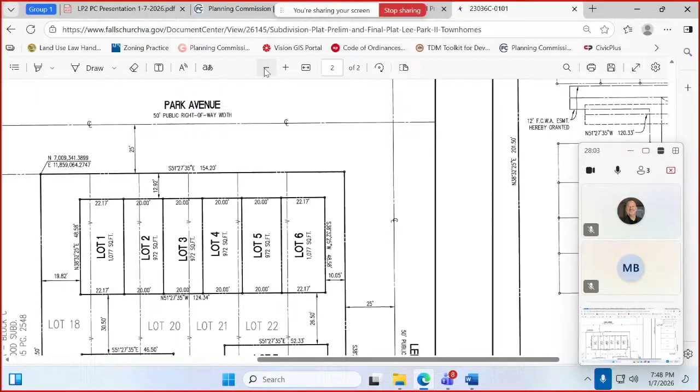Two public meeting signs were posted along the frontage of North Lee Street and Park Avenue on December 31st, 2025. This application was received on December 10, 2025. This subdivision has a 60-day review limit. Staff recommend that Planning Commission provide input and guidance on the subdivision application and schedule it for final consideration on February 4th, 2026. This concludes staff presentation.

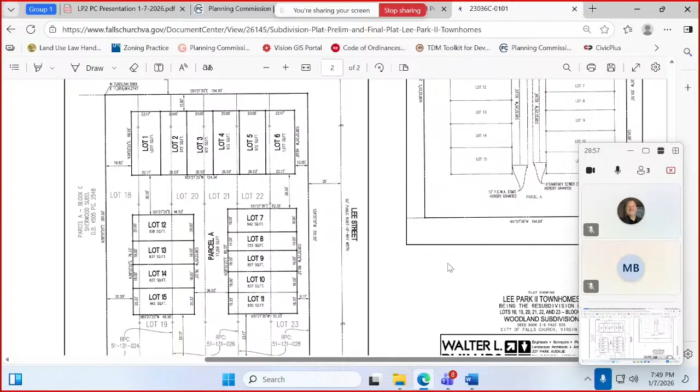Thank you, Mr. Zhang. Does the applicant have a statement tonight? They were going to talk about the site plan, not the subdivision. Do you want to talk about the subdivision? I have a presentation to give, but it relates more to the site plan. Correct. Okay, thank you.

All right, I think I can open it up to questions or comments from the commission. Save it for the site plan. Okay, the site plan drives the subdivision. So this will come back to us as an action item. If there are no questions or comments tonight, this is our opportunity to raise any issues. No? Okay, I also have no questions at this point. So I think we can move on to the site plan, the next item on the agenda. Yeah, thank you.

I'll be brief so I can turn it over to Mr. Rosenberger for an applicant presentation.

As Mr. Zhang had mentioned, the first submission for Lee Park's application, including the preliminary plat, final plat, and site plan, were received by staff and sent out for development review comment on December 9th, 2025. DRC reviewers met with the applicant on December 15th for additional discussion. Comments from DPW, planning, building safety, and AAB were received and are currently under review by the applicant.

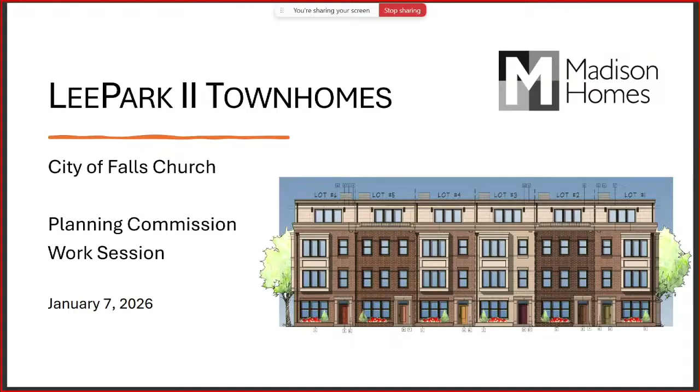So I'm going to give a short overview. If we can jump to the next slide, we'll just get right into it. Oh, I have control today. I didn't have control. No, maybe I have control. Maybe not. Do I need—is this thing on? I don't know how to tell. Is it because it's a PDF? Does it work during... dress rehearsal was great. Yeah, that works. Okay, all right, I'm in the driver's seat now.

So the project is just over 31,000 square feet. It is zoned T1. You can see the proposed site plan on the right, just to orient you. That's Park Avenue at the top, North Lee Street on the right. To the bottom, off the page, parallel to Park Avenue, would be West Broad Street, of course. Where the Compass Rose is, that would be Lee Park 1.

So this, as most of you know, is our third site plan application in the T-zone along Park Avenue. Lee Oak Park, which is to the left off the page on the other side of the Hilton Garden Inn garage, was approved in 2024, I believe, and then Lee Park 1, directly across the street from this property, was approved last year.

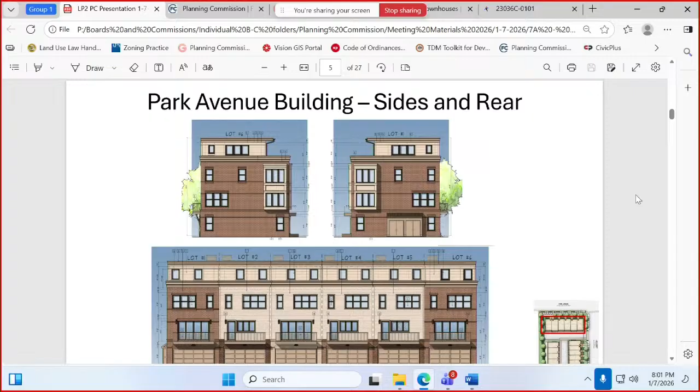And you can also see, this is the Lee Street building. There is a step back similar to what we're doing across the street and similar to what we're doing on Park Avenue. These units are 14 feet wide. This is a 14-foot wide unit, and this is a 16-foot wide unit.

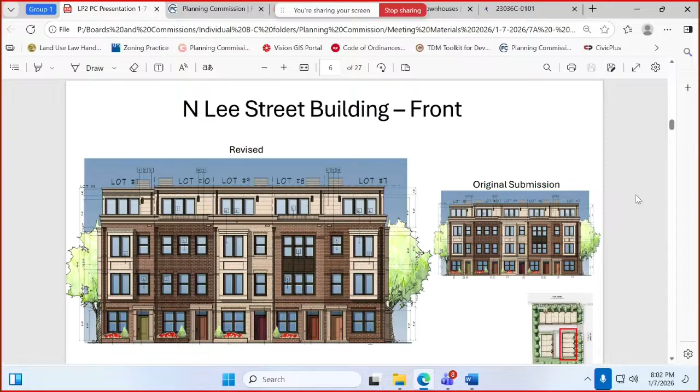And as well, it's a shared space. By default, it becomes a shared space for pedestrians and automobiles. We want to make sure pedestrians feel safe and comfortable walking in the alley and accessing their units.

And these are obviously three-level units. They will have their stairs up to the roof, and they will have exterior space on the roof, but there is no living space on the fourth level, unlike the other units on the project.

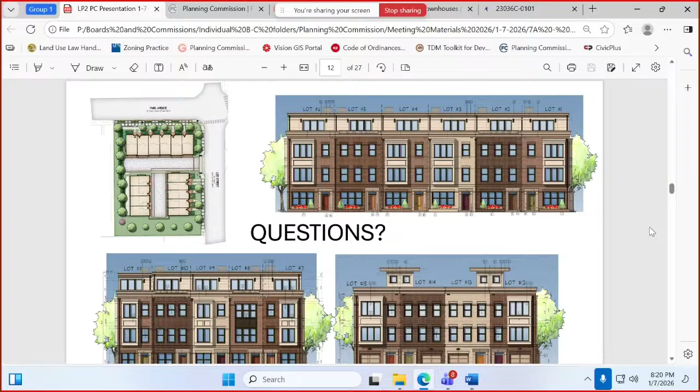One question that arose in my mind when listening to you talk about the stormwater runoff treatment is this: without that sort of extra effort that you're taking to manage the stormwater, would this be a buildable property? What else could go here, if not this, with the kind of treatment that you're giving to stormwater? And is there any precedent in other developments you've done for handling stormwater with this sort of retaining wall and underground approach?

So let me go, this shows it best. Lee Park 1 was just under 30,000 square feet. Lee Park 2 is just over 31,000 square feet, a little bit bigger, very little. If we didn't have this stormwater issue, we could certainly do, whether or not we would, we certainly could do exactly what we did at Lee Park 1.

Your other question is whether or not we've seen this before. It's a very unique set of circumstances. We've certainly done retaining walls quite a bit, but we've never quite encountered the issue where we've had off-site stormwater.

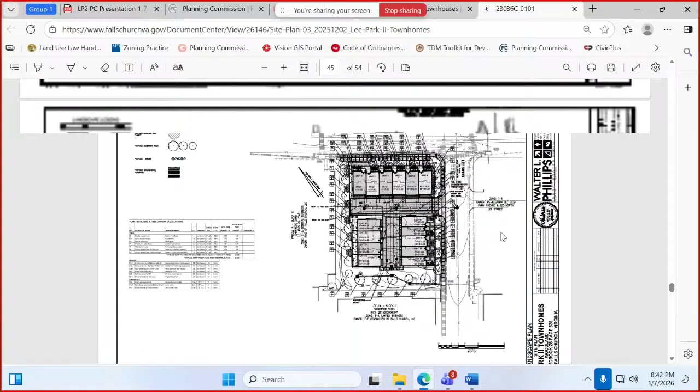And the other thing we need to keep in mind is that strip of land has a primary purpose as well, which is to accommodate overland relief in the event of a historic storm. So we just need to make sure one doesn't conflict with the other. Right. Okay. Any other questions or comments?

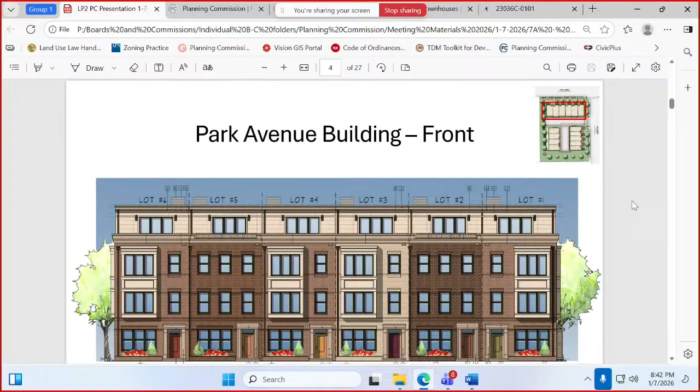Mr. Stevens, I've got some more, but did you want to go first? Nope, go ahead. Okay, if you can go back to that very last slide you had. This one? Well, the last one—this is kind of earlier in your deck. It's one that shows the... this one? Okay. You showed that little park area next to the Kensington.

Is there any more programming for that area? For example, a little mini trail that could possibly go there. I know you mentioned the stormwater and you're trying to make sure this fulfills that. We've received that comment—actually, we've received a couple of comments.

One proposal is to put some sort of open space programming in there. We had another comment that said put an easement on it and you can't do anything with it in terms of actual programming. Our intent is actually to put a small bench up here next to Unit 6 rather than down here—it gets complicated with the grade right here. I don't think we want a path going through; the path can really only go from there to there. Our preference would be to keep people on the sidewalk. I was thinking just the back—that's not to say this can't be used.

It's not our intention that it become a community-wide dog park, but I would imagine if you're living in these units and own a dog, you may find some use from that space. I was thinking kind of a mini version of what's behind the Whole Foods. Obviously there's not enough room here to do that, but it's something to give thought to that would make it more useful to residents.

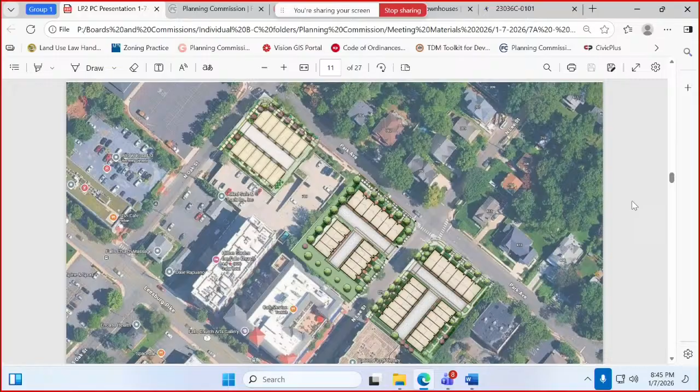Yeah, we can certainly look into it. This shows it, it does get tight in there. Because what'll happen otherwise is people will just tie a bike up to a pole or something.

For our residents, I would expect them to keep the bikes in their garage. Yes, for sure. This is more thinking visitors, trying to keep visitors out of cars because it's going to make a very congested street that much more congested unless there's some alternatives. So if it's convenient to hook a bike up someplace, maybe that'll attract some bikes rather than cars.

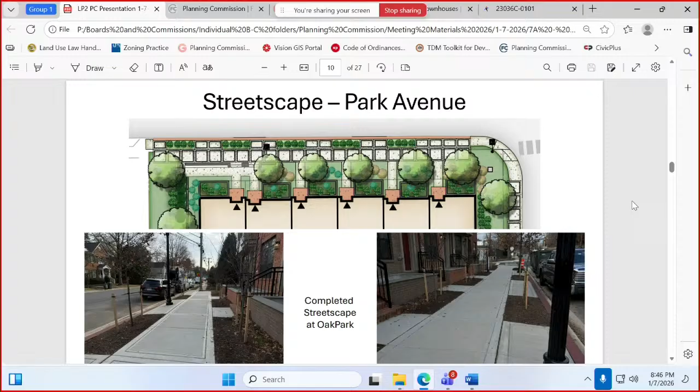There were some comments at the AAB on the single hung windows, but I was going to ask, you have single hung windows on this unit, right? We have a mix of single hung windows and fixed casement windows as well. Okay, well it just struck me that single hung is a bit more of a modern look, and I think they're more energy efficient than double hung. They are. That didn't come up in the AAB discussion, so I thought I'd share that.

There's some discussion of the parapet walls up at the top and what type of railing or whatever. I was wondering if you could address that. Can you step from one to another up on the roof there?

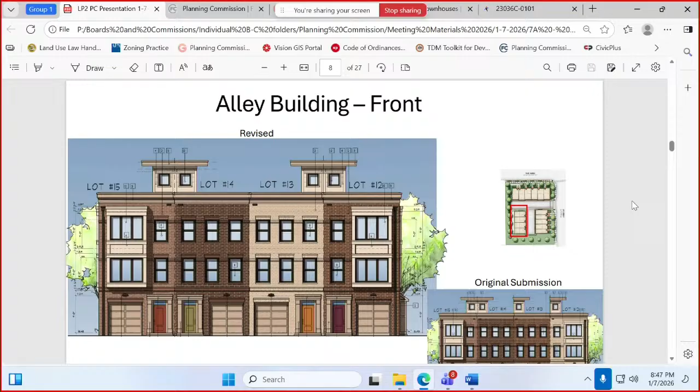Looking at this unit in particular, if you look there, what's shown here is that there is a demising wall or fence between units, the rooftop terraces of those units. It does not show here. You could argue it's there, but there would also be something here to separate, to provide some privacy between the two. Similarly, I think we have that on the roof terraces, just our standard roof terraces between. It doesn't show here, but I believe there is some demarcation between those two units. I don't know if there's anything in our code that addresses that, but I presume staff will be looking at that to make sure whatever is in your plans is compliant with our code.

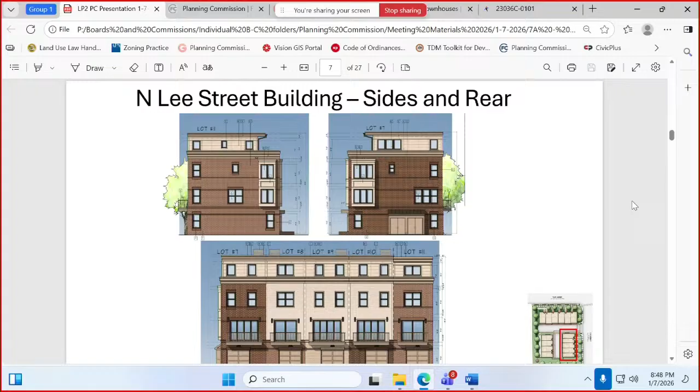Last thing I had was on this letter from Ms. Hyman about the deed restriction. I was a little confused on that. Her letter suggests the deed restriction is 20 feet from the back of the property line. That's correct, and normally we measure it from back of the curb. That's correct, but you're saying you'll meet the 20 feet from the property line. We are meeting the more restrictive of the two, which in this case is the private covenant, which is 20 feet from the property line. Okay, all right, that's all I had.

Thank you. Great. Thank you all, great questions.

I think most of the topics that I wanted to ask about were already addressed. So thank you for that.

One note for you, Mr. Trainer, in the future, can we attach the AAB comments separately from the rest? I missed those too. You had to search for them. Yeah, I think I got to the plans and thought that was the end.

I would second Mr. Stevens' recommendation for some sort of small path for residents through that grassy area. It just seems like, particularly for those alley units, having another way to access your home would be nice. If I were living there, I would like to be able to cut through that grassy area if coming from Broad and then off of Park to get to my unit. So I had that same thought, and I would second that recommendation.

I don't think I had any other comments. I'd also second his recommendation for the bike rack on Park. If you can squeeze it in, it would be used by visitors.

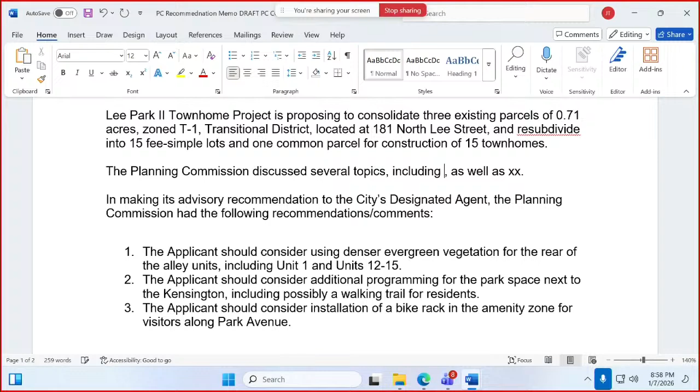Okay, and then topics, we need to update that? Yes, we talked about a lot of things. Stormwater, let's start it, yeah. I think this is something staff can just fill in, it's not the recommendations, it's more like minutes, right. Everybody here has faith in staff summarizing the topics we discussed.

Okay, thank you all. So then we have a motion, would somebody like to make this motion? Is this the, Mr. Duncan? I move the planning commission approve... I move that the planning commission approve the above recommendations, comments regarding the Lee Park 2 site plan application number 2025-0923, and transmit them to the designated agent for consideration.

And do we do a roll call vote? Yeah. Oh, I'm sorry, I should have asked for a second first. Question on the motion. I'll second it, then I have a question.

Just the wording - we haven't done this before, and we're still adjusting to the new reality after the state code change, but are we approving recommendations, or are we merely agreeing to transmit them? We're kind of transmitting them, and voting if there's a majority to send them as we've typed them up, but maybe we should be careful about using the word approving - we're not really approving anything, we're merely agreeing that we're aligned on the above recommendations.

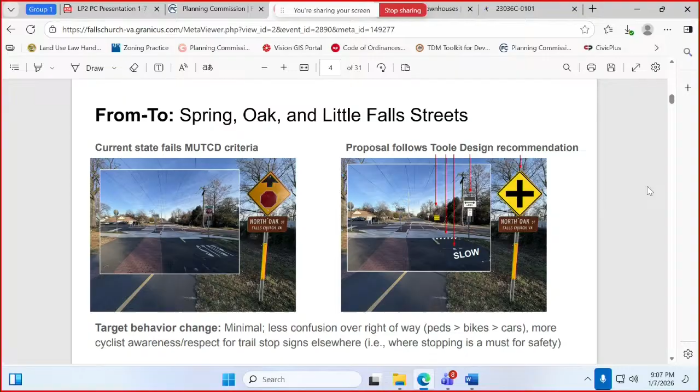So overuse of stop signs, just like on the road, is a dangerous thing. By removing these and eventually others, it makes the stop signs that are left, where they're really required, more effective.

On Great Falls and Grove it's the same. These are still two-way stops for the trail only. The hope here is we can get these to do a one-year pilot of four-way stops, see how that goes, and then eventually move to the same two-way stop configuration.

Great Falls is really dangerous for a couple reasons. It's a very complicated intersection. You've got the dual trails, a sidewalk, Pennsylvania just off the picture there, and two short blocks away, both Riley and Great Falls. There's a lot going on there.

So by putting the stop signs on the road, you get less confusion over who has the right of way. You get less of the stopping and waiting, and you'll see fewer injuries and just slower, more calm behavior at this intersection.

There's no intersections like this to the east, so with Nova Parks, I would talk about moving to the west. Falls Church is a great place to pilot this in a more urban environment, and then over time move through Vienna, Reston and Herndon. But we're part of the vanguard in this regard.

So that's my spiel. Lots more obviously in the presentation, but we'd love to hear your questions and reactions. I'll take notes here and evolve this thinking as we work with Nova Parks.